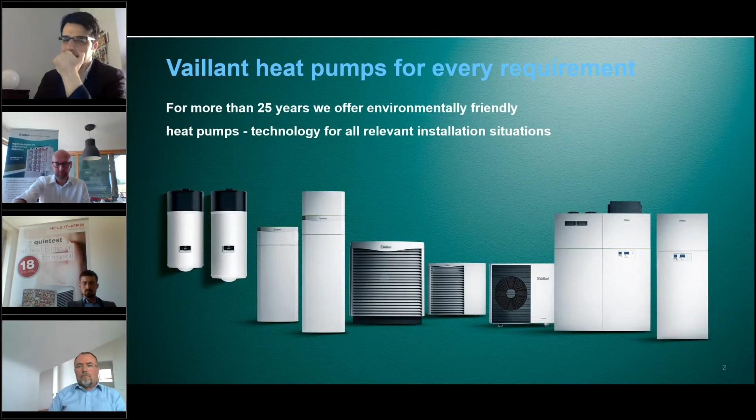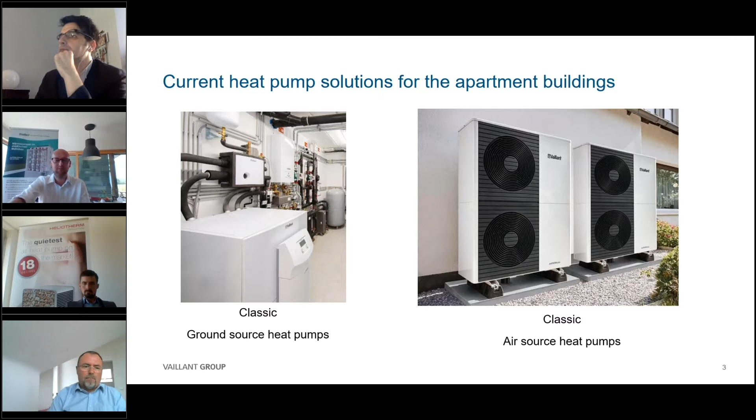The current situation for heat pumps in apartment buildings is the classic centralized solutions based on ground source heat pumps or air source heat pumps, which are well known and well established across Europe. This is not the complete innovative way, but now we have a new situation and a new solution offering, now in Austria for example, and also across Europe.

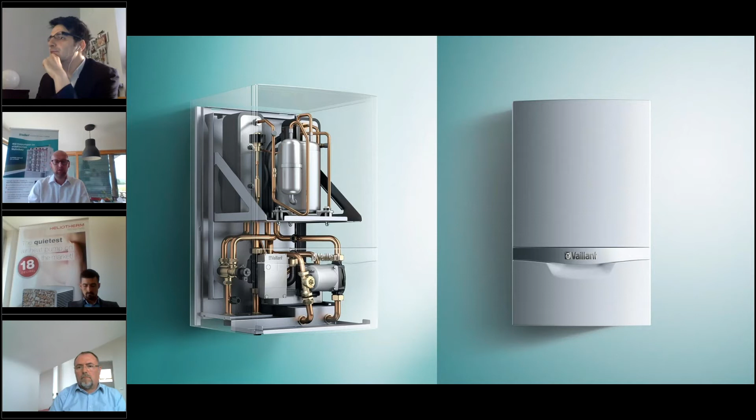We have a mini heat pump, which you see on the right side. It's not a gas boiler, it's really a mini heat pump. It's a fully equipped heat pump with a complete cooling circle, and also the complete heat distribution and control unit is placed on a wall-hung machine, which is the same size as a gas boiler.

So why do we need such an innovation in a multiple family house? As I said at the beginning, in Austria the modernization wave in the multiple family sector is below 1%. We are facing 0.8%, which is very low at the moment, but we have very high ambitions to recover and reach our 3% target for the next years.

So we found a solution, or we took a step back, talked with some shareholders, with city owners, and we needed to install, implement, or look for a solution for modernization and also for new build and high-rise buildings in the cities, or across Austria.

So we came up with a new innovative way for each flat, especially for the cities in this case. And according to the Renovation Wave, which we stand in front of, we can really say that the heat pump is the easiest solution to fulfill the complete building requirements on modernization, also on the new build sector.

At the end, the last point is that we create a unique solution which allows a stepwise modernization for each building. This means you can implement a system, and then all the flat owners can say, okay, I want to change now, or I want to change in 2 years or next year. I can really stepwise modernize each building, covering my mini heat pumps on one project, or stepwise in a phase of 2 or 3 years.

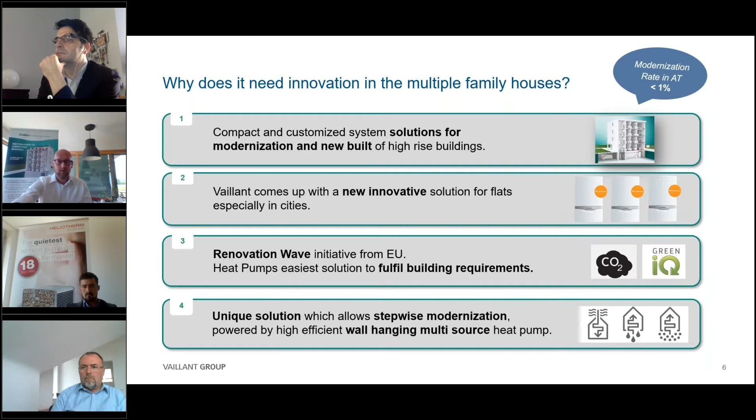Now I want to introduce the easiest, or most interesting, solution: with an air source heat pump as the source. At point 1, you see the heat pump Flexotherm with aroCOLLECT as a source on the outside, which is basically placed next to the building, in the garden, or on the roof of the building.

This supplies or produces very high efficient 20 degrees in the buffer tank, in the heating room in the basement, and for distributing the source through all the buildings to the flats, we use, for example, the old gas supply through the buildings, or old chimneys or whatever. So we bring a very high 20-degree temperature to all the flats.

This allows us to run the mini heat pumps in the flats at a very high efficient level, and we can provide for each flat heating, passive cooling, and domestic hot water at the same time, more or less.

Also for the decentralized domestic hot water solution, we can offer a wide range of different solutions, which we select depending on which space is required, or where we can place the heat pump. So we have really lots of different solutions to realize the system in each flat.

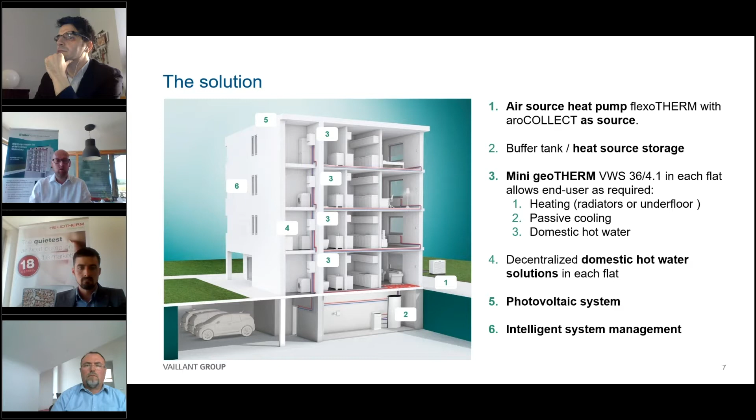So I also want to give you an idea of how this works in real life. I'll introduce a project in Austria, a modernization project. We are modernizing a building with 12 flats. In this building, they completely removed the gas connection and placed a heat pump instead.

We have 12 flats, and for heat distribution we are using the existing radiators, showing that modernization works very well even with radiators. For domestic hot water, we are placing 150-liter tanks below the dishwasher, which is very important for space, because in modernization people don't want to give up space for the heating system anymore.

So we need to discuss and find the right place, the perfect place, to put the system in the flat. And how does the source for the heat pump get into the flat? As I mentioned before, on the roof, shown in red here, we place the Flexotherm and the aroCOLLECT, which is the air source heat pump. On the roof we have the heating room.

We supply distribution lines through the chimneys and the old shaft of the gas connection, distributing 20 degrees through these shafts directly into the flats. So we can guarantee very high yearly efficiency rates compared to other systems.

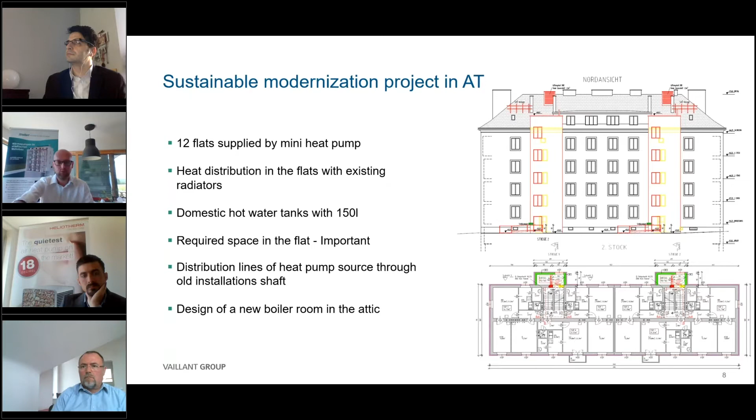Then I want to introduce a new build project, also in Austria. In this case, it's a nearly energy-autonomous village with a very intelligent system in place. We have 62 flats in this small village, also supplied by mini heat pumps for heating, passive cooling, and domestic hot water.

Each house — there are 6 in this village — gets a PV system on the roof, which supplies electricity directly to the heat pumps to run them, also supplying charging stations for the cars. Over the entire system, we have intelligent system management together with a partner to maintain and run the system most efficiently.

And nearly energy autonomous, the heat pumps run directly on energy from the sun, and of course the domestic hot water preparation, and all these things together are maintained and controlled via this intelligent system.

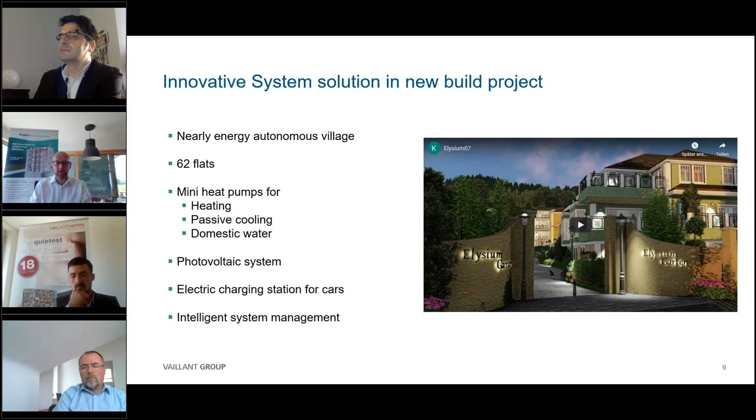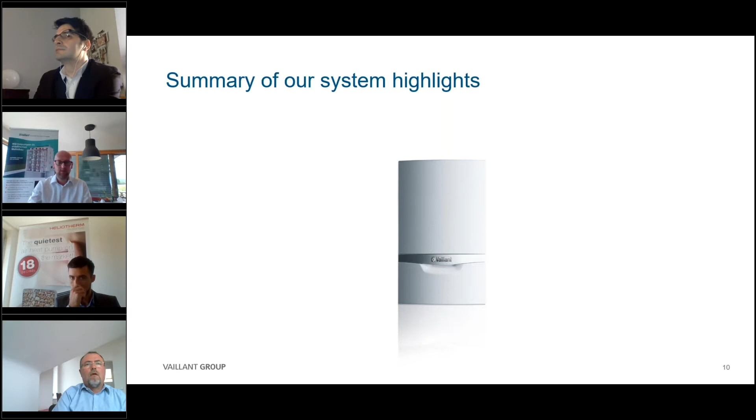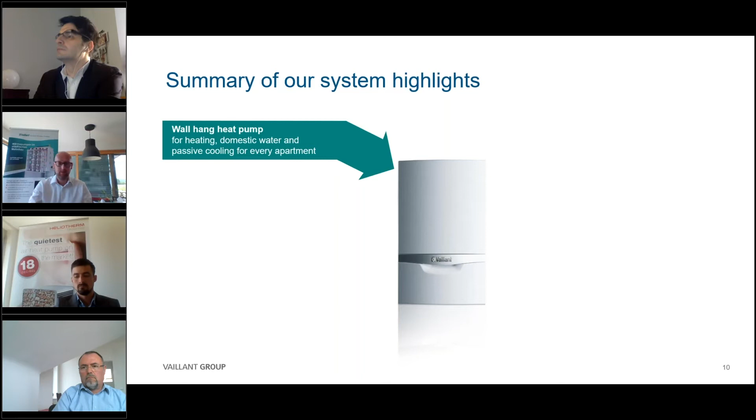So that's my 10 minutes. I just want to summarize the system highlights of our mini heat pump system. Of course, it's a wall-hung heat pump for heating, domestic hot water, and passive cooling for every apartment. We also have very high CO2 savings due to our innovative and intelligent energy concept.

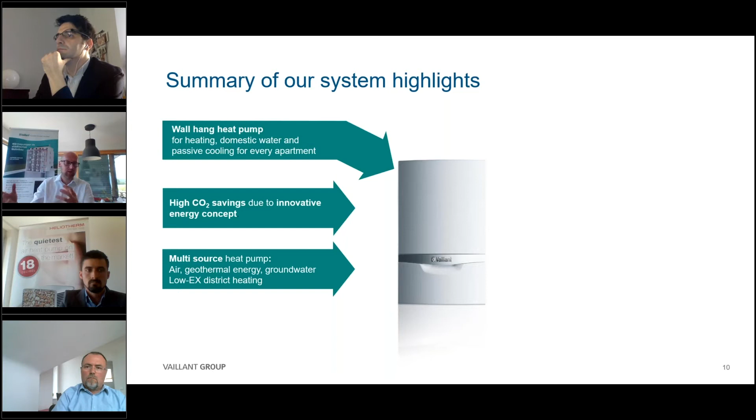For me, this is the most interesting solution for urban areas. It's a multi-source heat pump running on air, geothermal energy, groundwater, and also low-exergy district heating, meaning we can connect extra heat from industrial processes to run our heat pumps, which is also very interesting.

It's a solution for both new buildings and modernization, which is also very important. As mentioned before, we have very high sustainability — we reduce the ecological footprint for each flat, and as a further benefit, we reduce heating costs for each flat, which is also very interesting.

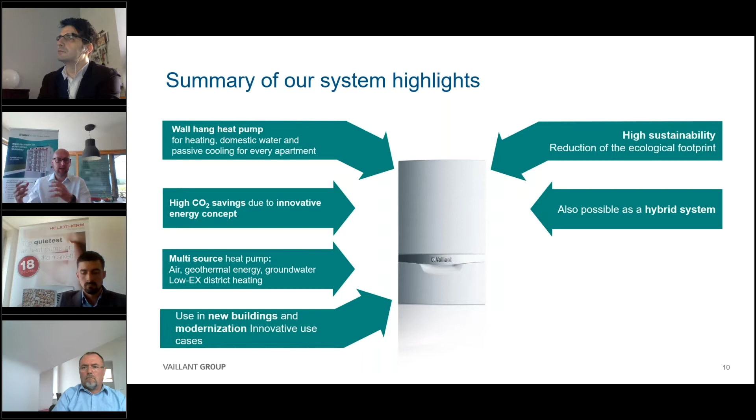What's also possible is creating heat pumps together in a hybrid system, meaning that, for example, bigger flats or bigger systems that need additional energy sources can have a hybrid system, for example with a gas boiler. So we're also able to connect the system to hybrid setups to get higher output rates. This is also possible. The next point is we have minimal space requirements for each flat.

This is very interesting to discuss with all the stakeholders in renovation. And of course, as mentioned before, we reduce heating costs for each flat. It's also very easy to operate as a decentralized system for each house owner, which makes it very interesting for house owners too. We are working on several projects at the moment, and I look forward to your questions. Thank you for your time.

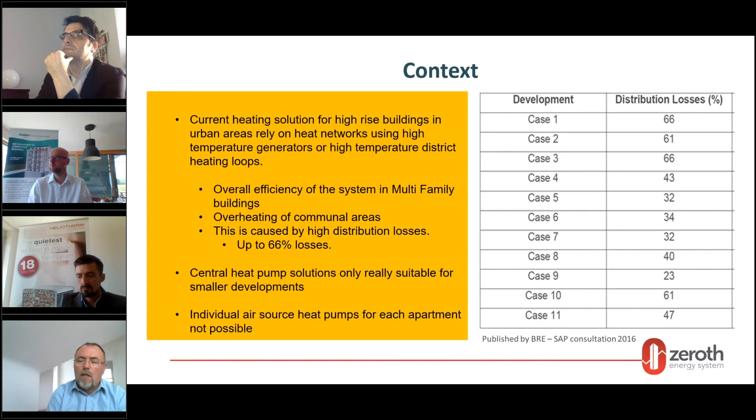So looking at this, we came up with a relatively simple solution, similar to Andreas's solution: to reduce losses in a heat distribution network, you reduce the temperature in that distribution network to ambient temperature—ours runs at 25 degrees—and you take all the losses out. When you do that, you need to give the energy a temperature lift in the apartment. Therefore we developed a heat pump for each individual apartment which can do space heating, hot water, and cooling, both active and passive.

I'll come to the challenges in a few minutes, but this design is ideal for new build and also works for retrofit. It fits the demands of developers because they're used to heat networks—they don't have to change, they just replace the heat interface unit with a different unit, but otherwise the same design concepts can be applied. In terms of central plant, they can still connect it to district heating networks.

An interesting fact about district heating networks: there was a Horizon 2020 project across Europe, the Heat Roadmap, and one finding was that we are wasting enough low-grade waste heat across Europe—from air conditioning, power generation—that we could heat all of Europe with it. So district heating, or low exergy district heating, is very relevant in the transition to a sustainable world, because the energy is already there—we just have to use it.

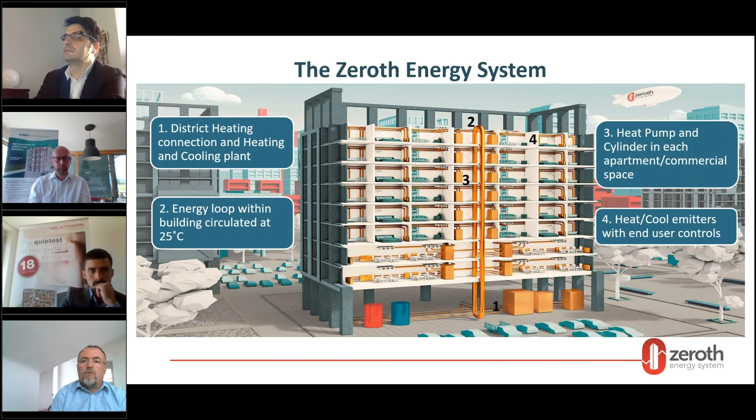I'll show that in the next slide. On the right-hand side, you have a lot of energy sources which you couldn't use with a high temperature heat network because you just couldn't harvest that energy—waste heat from transformers, from data centers, from landfills, connected to mine waters...

On the left hand side, you have more conventional heat sources. You can use gas boilers or CHP units if this is what you require, or as a peak load gas boilers. But you can now introduce air source heat pumps, ground source heat pumps. Connection to the district heating is still possible.

Another interesting aspect is the introduction of storage. Everybody talks about battery technologies and how we can store intermittent renewable energy in batteries. But with a system like this, you can introduce large stores in the basement, very low cost-effective stores. You store the energy at 40, 50 degrees, your losses are very minimal, and your store medium is water, so it's a very low cost store.

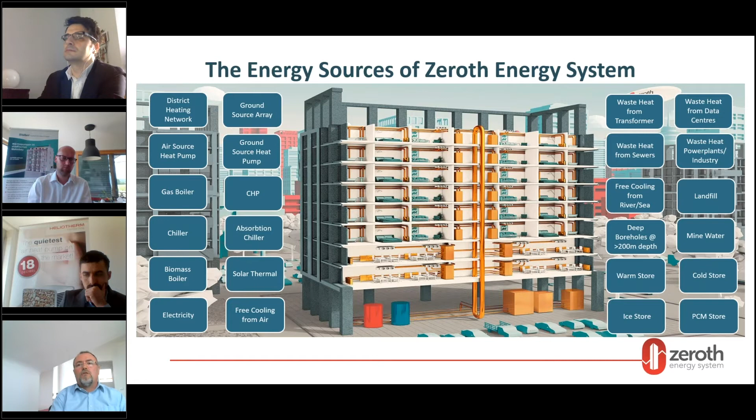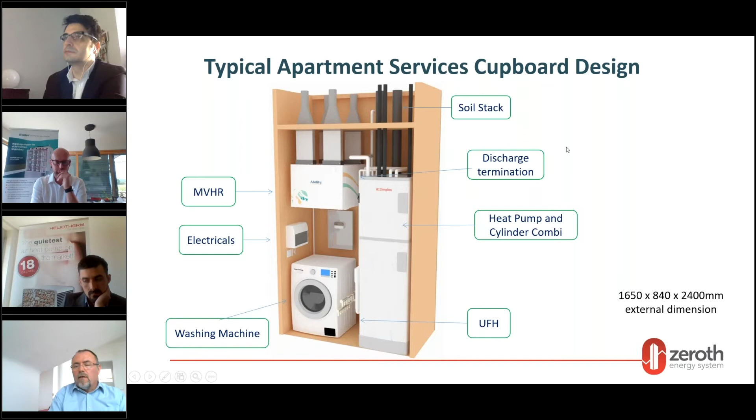The second challenge was obviously noise. We're putting now up to 9 kilowatt heat pump into a residential area in the middle of an apartment. Just to illustrate that, here you have a cupboard, a double cupboard, and that's where the utility room is, just beside the dining area in a small apartment. So noise is absolutely critical. We had to meet basically the same noise levels as a modern fridge, otherwise people wouldn't accept that.

As I said earlier, you need to bring your end consumer onto this journey, and he has to be happy with the system he ends up with. When I open the doors, you see the unit here. In this case, I'm showing you also the fan coil. So with that system, we can heat and cool. Cooling is quite often neglected, but those high-rise buildings are overheating - they need to be cooled as well. Customer comfort needs to be addressed.

Okay, I'm aware of the time. When we did develop the product, we also did an overheat study, because that was one of the concerns we got back from the developers - that the existing solutions and existing buildings, the older buildings with heat networks, are dramatically overheating. So we took a building, we modeled it up, and we did CFD studies.

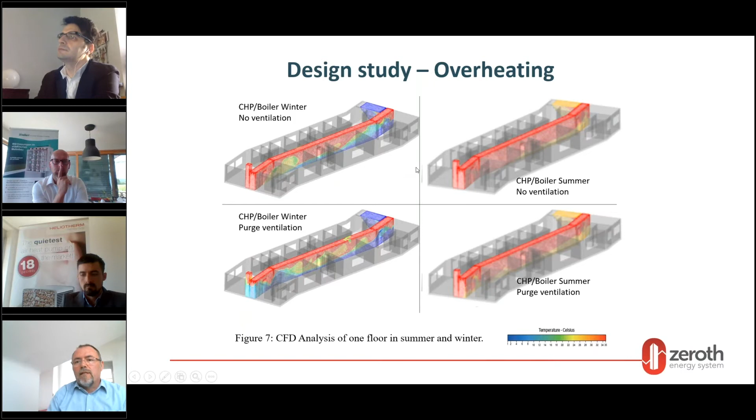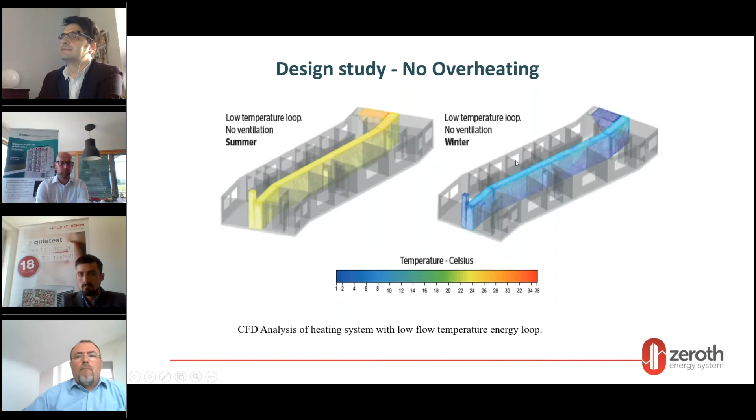One of the issues applying this technology - and I think we didn't discuss it in our earlier discussion - is that when you have a solution for a problem like that, you still need to apply it, and to find somebody, a developer, a building owner, to want to apply a new innovative solution is quite difficult, particularly if it's multi-residential. Maybe it's 100 apartments, 50 apartments, 200, 300, 500 apartments.

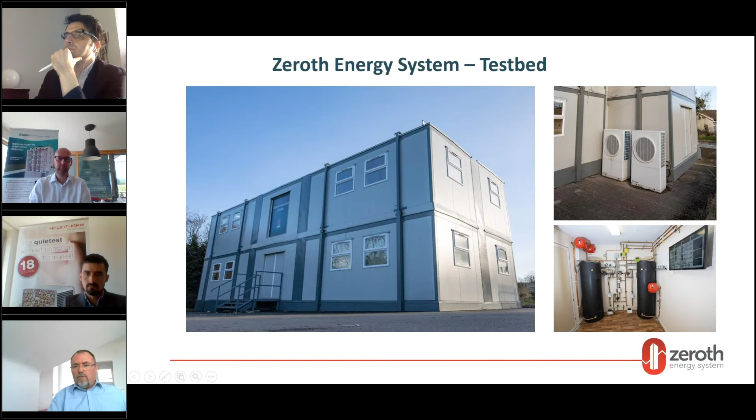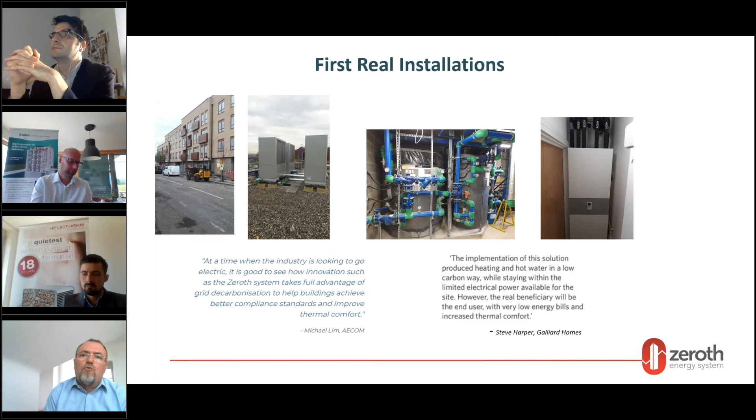One final point I want to make is that it's difficult, when you have an innovative solution, to actually get it into the market, because people try to do what they already know, and that's where we need help to de-risk those solutions and their application.

Heat pumps in high-rise buildings, tower blocks in the UK, Manchester, Edinburgh, and a new type of heat pump in Holland. The floor is yours, Sebastian.

Okay, thank you very much. I'll look at the time and start right now. This is our factory in Austria where we produce all of the units, and there is only this one. The building is quite new, about 10 years old, and the company is 32 years old in total, but I won't keep too much on that.

So I'll start with heat interface systems for tower blocks. As my colleague mentioned from Ireland, there is a problem if you distribute high temperature throughout high-rise and low-rise buildings because of heat losses. Mostly in the 60s they didn't insulate the pipes very well, so there's overheating in summer and a lot of heat loss. In a typical building with, say, 50 flats, it's 3,000 pounds just in heat losses.

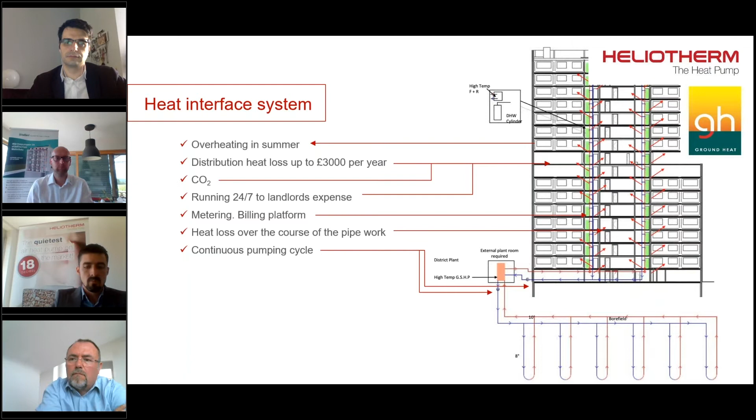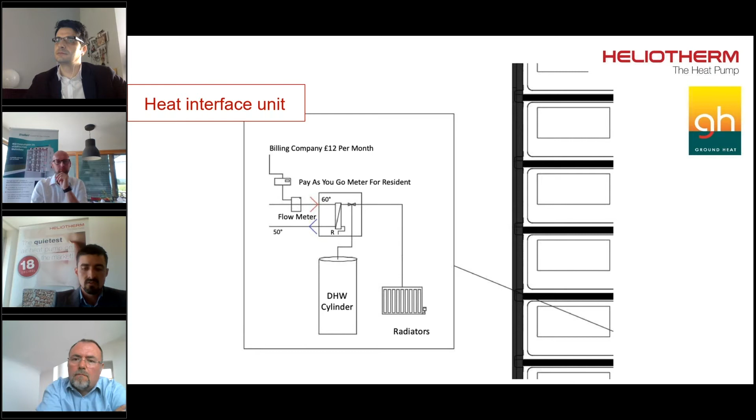This is very negative, but I won't dwell on it too much because it's very similar. You can see how you have to circulate 60 or 70 degrees throughout the building all the time through a plate heat exchanger, and then distribute it to the flats. This is very inefficient and not very positive to do it this way. This is like the old times we used to do it, but we have to fix it.

There's also the possibility of putting heat pumps outside instead of connecting to mains gas or a district heating system. But there's no point putting in these systems when you still run the distribution in the house at high temperatures, because the COP of heat pumps is inversely proportional to the temperature—the higher the temperature, the less COP you have, and that's not very good. I came across a few projects recently that wanted to do it this way, and it's not very good.

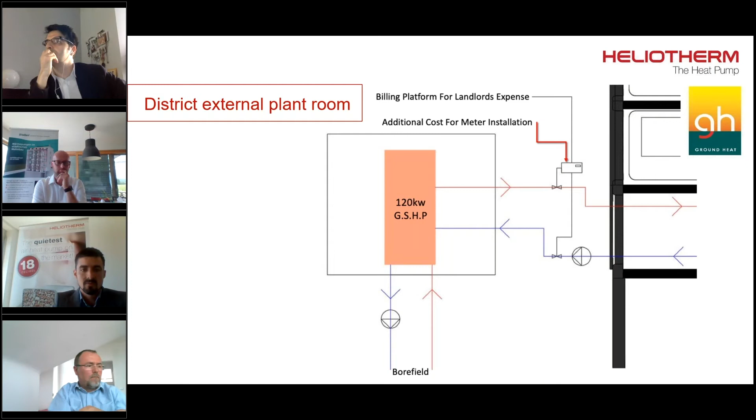So what we are proposing is that we cut out these systems. We don't have high temperature circulated throughout the buildings, and we don't have any heat interface units, which are also quite costly—when you compare them, you can buy them for 1,500 euros, and this also brings up the price if you combine it.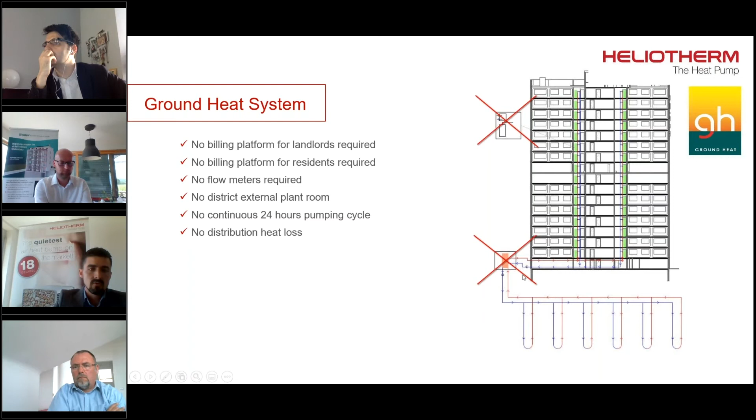Our benefits are: no billing platform for landlords, no billing platform for residents, no flow meters, no external plant room, and the pumps are not running 24 hours a day, which also consumes energy and produces waste heat. The distribution heat loss is also very low, because we distribute the water at a low temperature, or the same temperature as the building, as you can see here.

What we do is go in with the pipework directly into the building, usually at around 7-8 degrees depending on the period of the year, and then run it throughout the building. There's also the possibility of building in a booster heat pump in the basement. If you have a retrofit building and cannot insulate the pipes, if they're old steel pipes, then you boost the temperature up to 20 degrees, so there's no temperature differential in the building. This saves a lot of money on installation—you don't have to rip up any walls or corridors. So those are the two possibilities that we offer.

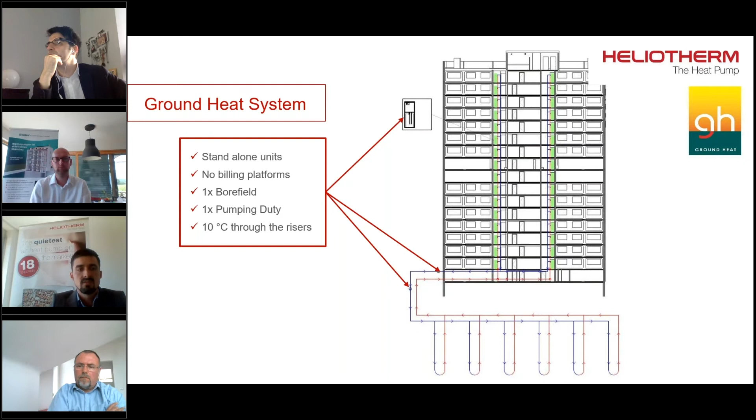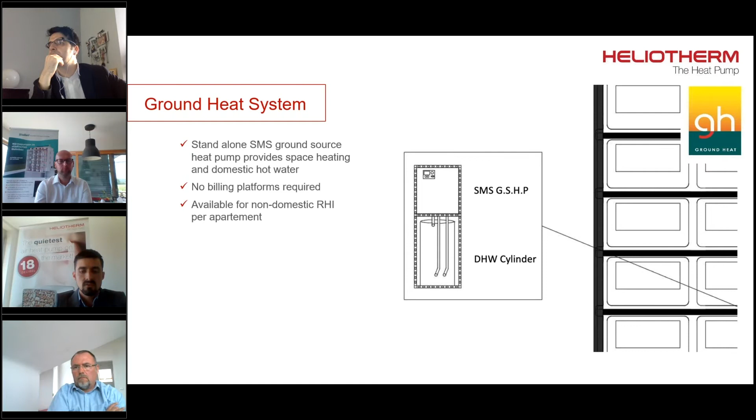We also have our SMS ground source heat pump. SMS stands for Smart Module Solution, because you can have it as a ground source or air source unit. It's a very clever solution, and we do this with a lot of customers in the UK.

When you take off the covers from the unit, this is what it looks like. We have a small heat pump on top, which holds all the refrigeration. In the back, it has the circulation pumps, and in the front, the electronics.

Below, there's just a standard hot water cylinder with a coil, because some countries like Holland want to use their own, some people in the UK want to use their own, and some people in Spain have their own hot water tanks that they like. So we leave this open to the client.

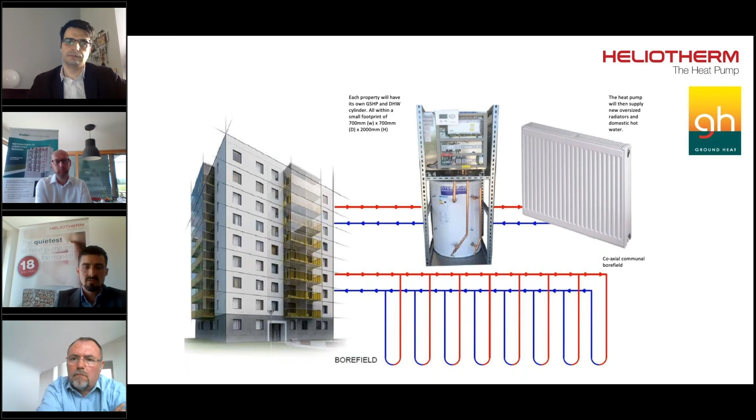I'll start now with my actual case studies. We have two cases: either ground source units or air source units, because I don't want to favorize one or the other—it's not fair to do that.

Last year we did a few flats in Edinburgh with a big unit of ours, and that was the simplest way to do it, because it's very tight—you cannot drill—and it worked very well.

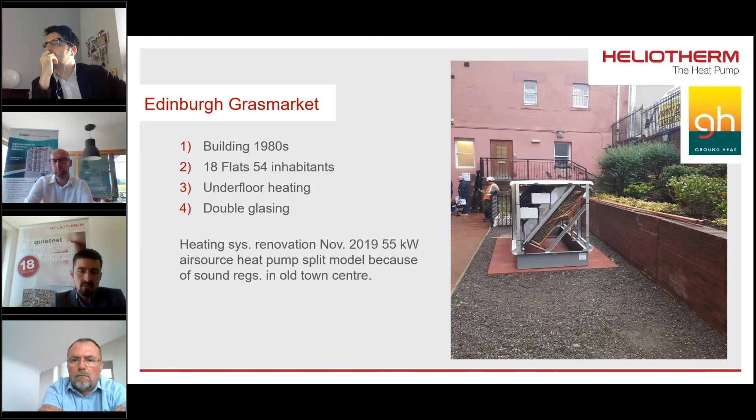This is the more simple version that you can retrofit into any building. There's no special installation needed—it's already got underfloor heating inside and hot water cylinders in the flats. So this is the out-of-the-box solution: you have a building, you need a heat pump, you put it in, and it's fine.

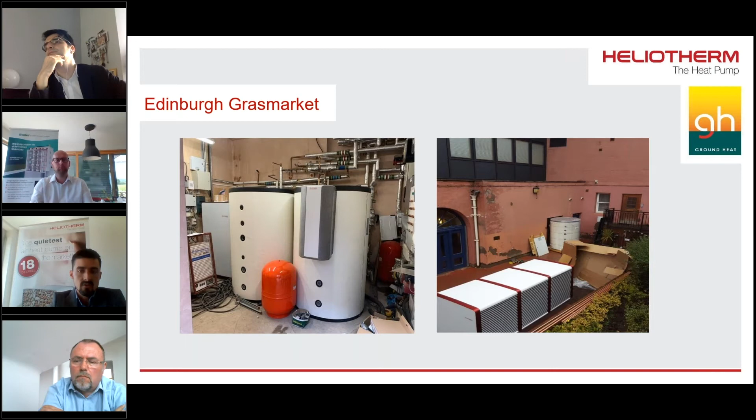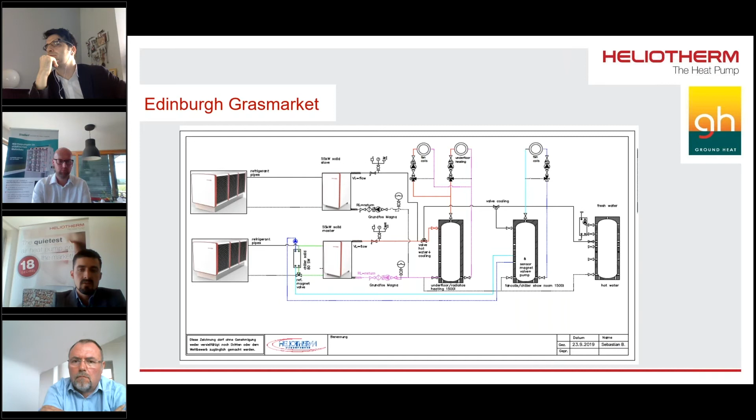This is the quickest way to renovate something, with air source units—this is our air source split version. This is a simple hydraulic schematic which we provide to installers, planners, and architects. Not very hard to understand.

And this is the even simpler version for the customers: a 60 kilowatt monoblock unit where you don't need any F-gas certifications. If you have bigger buildings, you can put multiple cascades—for example, five units—and just heat the building tower, the building block, with this. So this is the simple air source solution we can provide.

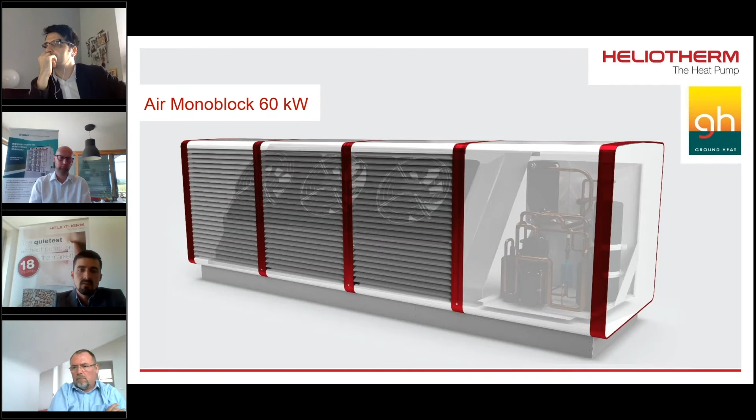Now we come to the more complicated solution of mini heat pumps, same as my colleague mentioned before. We did this in Manchester tower blocks, and each tower block has around 100 flats—some have 80, some have 130.

So there's a lot of things to conquer in these buildings. First, they are very high. Second, they are very old, and everything on them was made in the 60s, 70s. So there's a lot of work to do in building renovation—you have to put in new windows, new insulation, and make a lot of adjustments in the building, also with the radiators.

But it pays off, because as we discussed, there's CO2 reduction. The heating cost was 700 to 1,100 pounds per year for the residents, and we brought it down to 140 to 340 pounds, depending on how much the resident heats their flat. So that's a cost reduction of let's say 70%, and also a massive CO2 reduction. By the way, this was with electric storage radiators, if somebody wonders what it is.

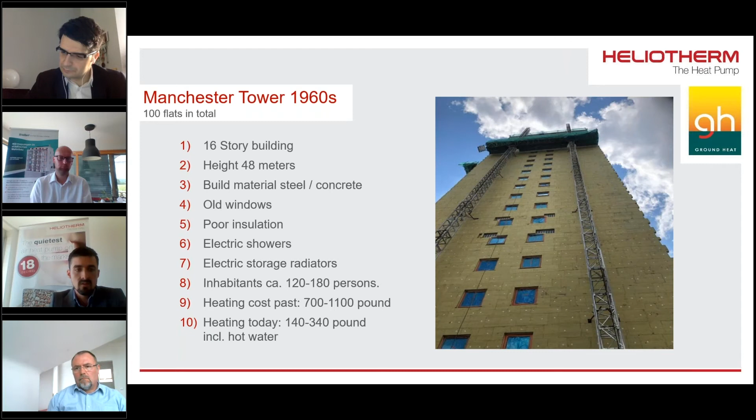This is what the units look like when they're built in. This is the electrical cupboard that's very typical for tower blocks—in Vienna, Berlin, all over the world. The unit is made to fit into a 60 centimeter door. The units are quite narrow, only 54 centimeters, so you can actually fit them into any normal door we have across Europe.

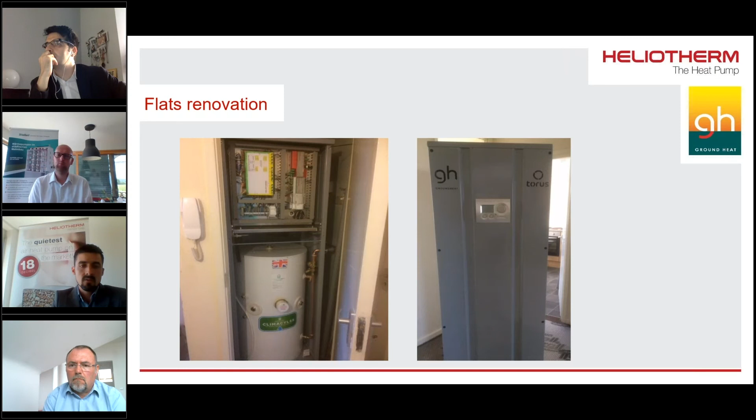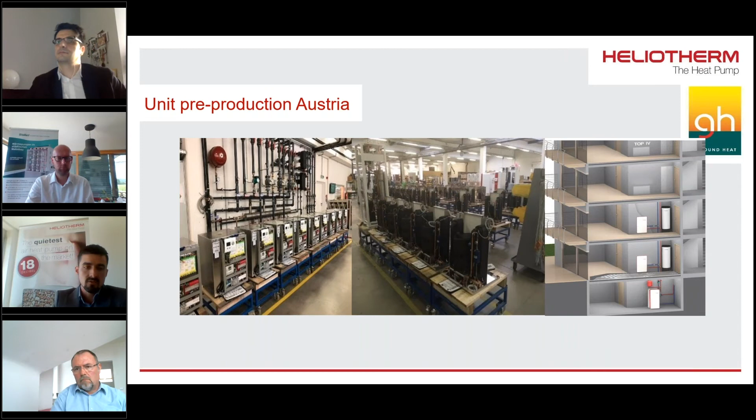This is what the units look like in production. They are mass produced and very small. They already come pre-adjusted. You just put in the cable, flick it on, and it's already got settings so you don't even have to do any commissioning anymore, because that consumes a lot of time. So we do the pre-adjustments for the clients.

Typical layout of the flats, and this is the distribution of the riser system in them. We come up with a big riser pipe, go down the other way again, and then tee off with 28 millimeter pipes, so we have a hydraulically balanced system.

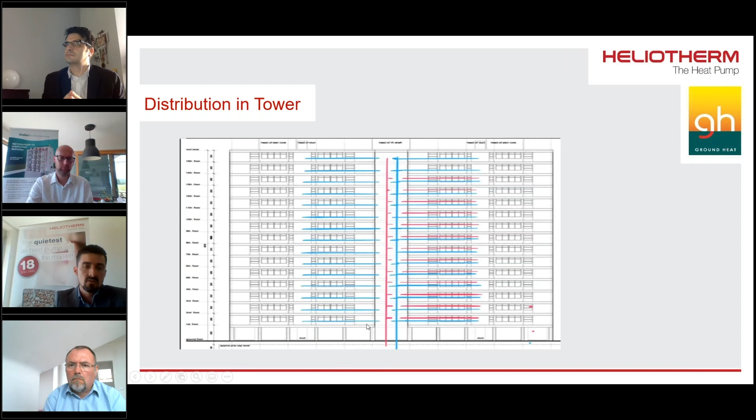The bore field was done on the parking lot because it's always a question of place. In high-rise buildings we don't have any space for air source units on the roof, since we would need 600 to 700 kilowatts there, which would be too much weight for the roof and there's no space available. So the ground source solution is more costly, but it's a reliable energy source, and every tower block has parking space around the building. This was the best solution without needing extra land - there's always the question of space, but there is space, you just have to look for where it is.

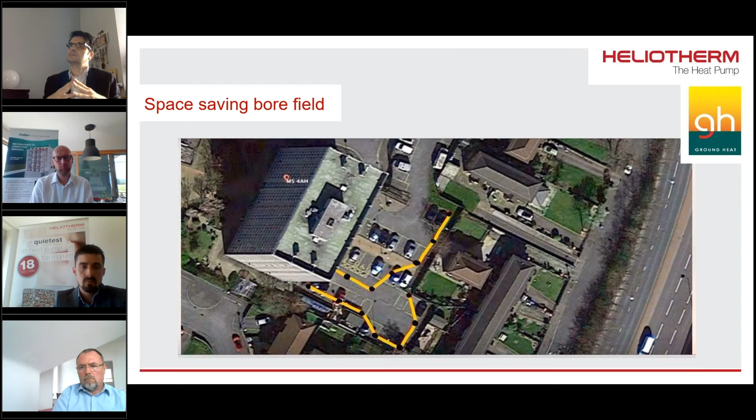We also used a special bore probe made of fiberglass. It's not traditional, because we save around 50% of the bores needed - we only have 17 or 18 bores versus 40 to 60 with conventional bores.

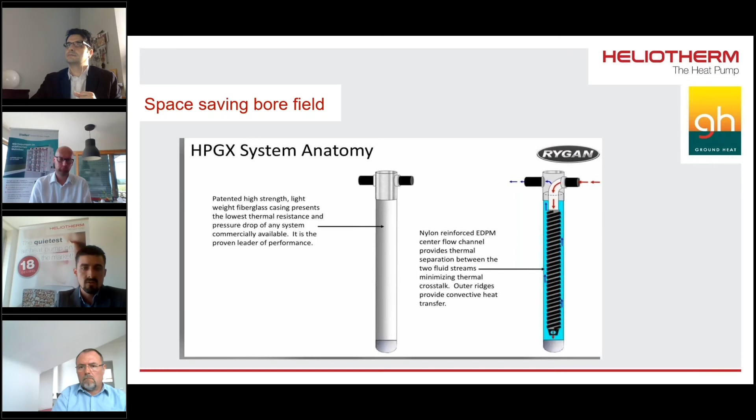That was drilling on the parking lot, and that was the drilling of the next building. It looks quite similar, but it's even more - 138 flats - and we were also very successful with that one.

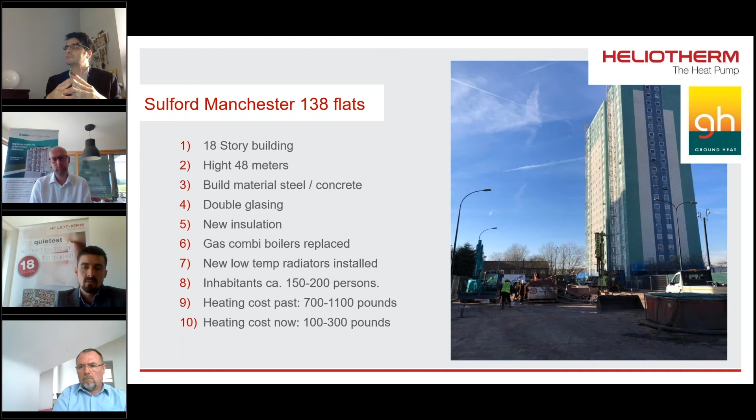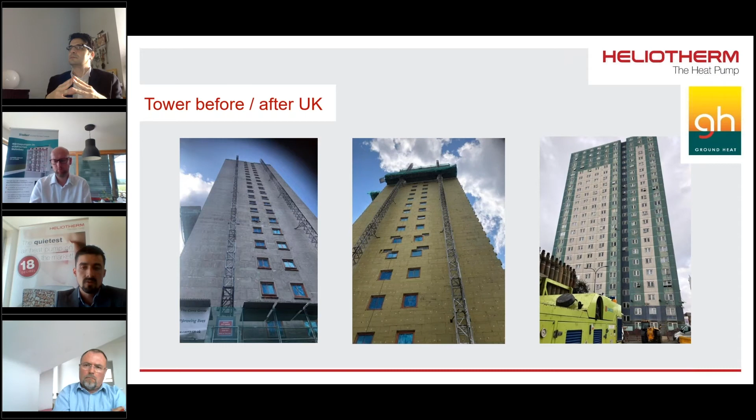And this is for social housing, so it also brings a better quality of life to the people there, and they have environmentally friendly heating. That's the main point of it.

Okay, this was the presentation. I won't take too long right now, I'll just show you - can you see my screen?

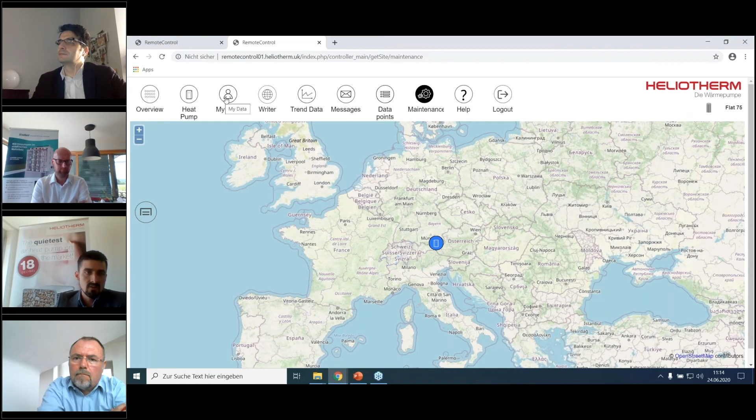We have all of the units online. I'll show you the units right now, because it's very important that we can service them. If a unit goes into error, we don't want to disturb any resident - we fix the unit over the internet, or the service technician does, and that's it. This is also a benefit, because we really have to appreciate the residents' privacy, and we don't want to go there anymore. So we can actually fix anything from here.

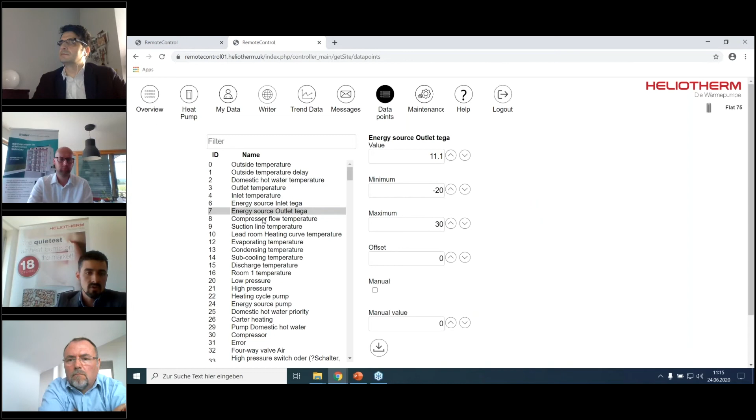If you go to data points, you can see the temperatures and anything from inside the unit. We have over 400 parameters that we can control here, so if we need to fix anything, we can do it online, which is also a very good benefit.

For the future, we're also talking about microgrids and connectivity with electricity providers - at peak times between 5 and 8 at night, we can basically reduce the whole tower block's heat pumps, since these are inverter units. We can reduce them to minimum consumption but still have enough heat so residents don't get cold. This is something we have to consider with heat pumps in the future - working together with grid providers and electricity companies to save CO2, because at peak times a lot of CO2 is produced from fossil fuel backup generators.

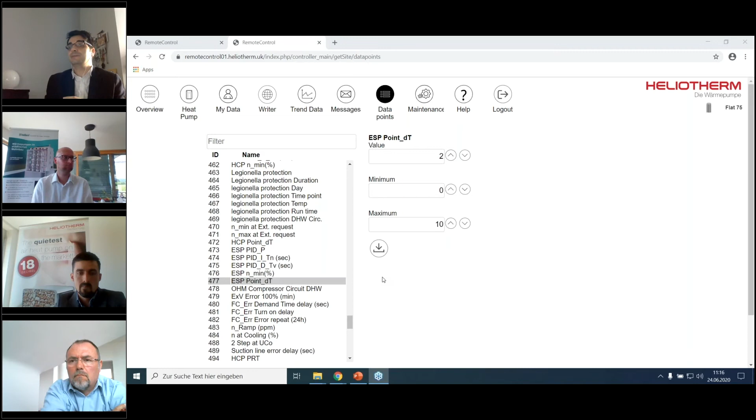A lot of information to take in, but I must say, just looking at them, the heat pumps look very good. From a design standpoint, the space requirements are taken into account and so well designed into the product. The noise and everything related to it, the testing that goes on, the way that they're already integrated in projects, with replicable results - you put them in, and all of them can be scaled and easily replicated.

I also saw a lot of mentioning about the role that the end user has, about the building owner, about the design of the building and taking advantage of it. Andreas showed the building and how they were taking advantage of the chimneys, of the shafts and the infrastructure that is already there. So basically, heat pumps are not only feasible as a technology, but they are well tested. They look good in the renovated building, and they are visually appealing even.

So what would you need to scale this renovation? Andreas was talking about less than 1% in Austria. He would want 3%, but how much would we actually need? What is the percentage you would need?